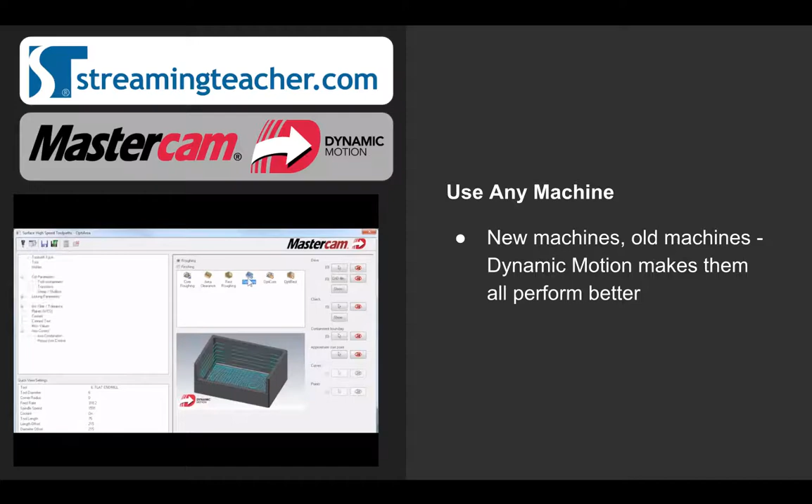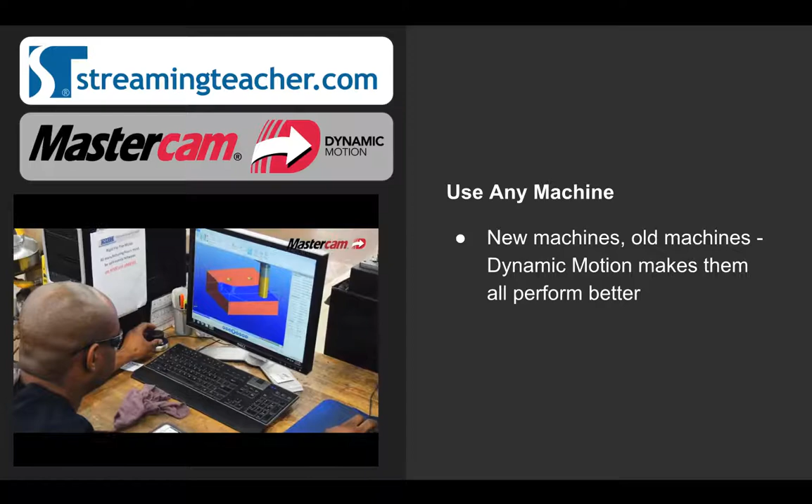I've seen the Mastercam Dynamic Milling Toolpath in the menu a hundred times going through there to get to what I needed. Never really wanted to use it, never understood what it was or how it worked. Then one day I saw a gentleman I work with using it, really liked the idea, got involved in how it works and how it applies to what I was doing, and honestly I would never want to be without it again. My name is Robert Fagelman, I'm a CNC programmer, and I work at Exceed Molding Tool.

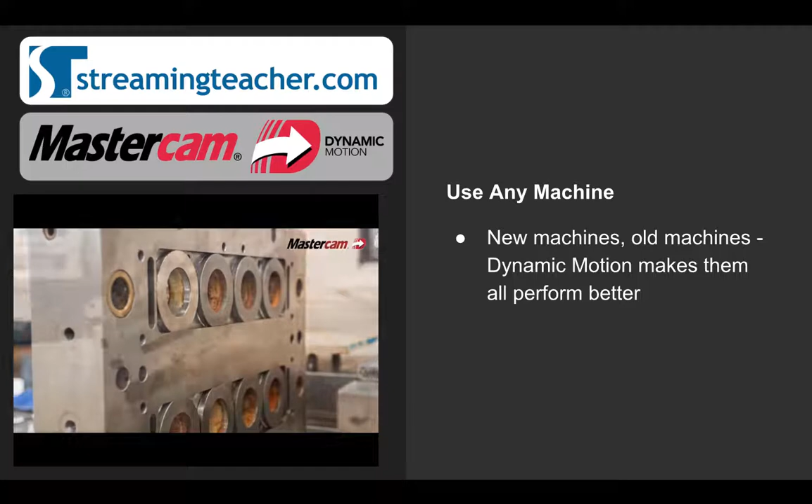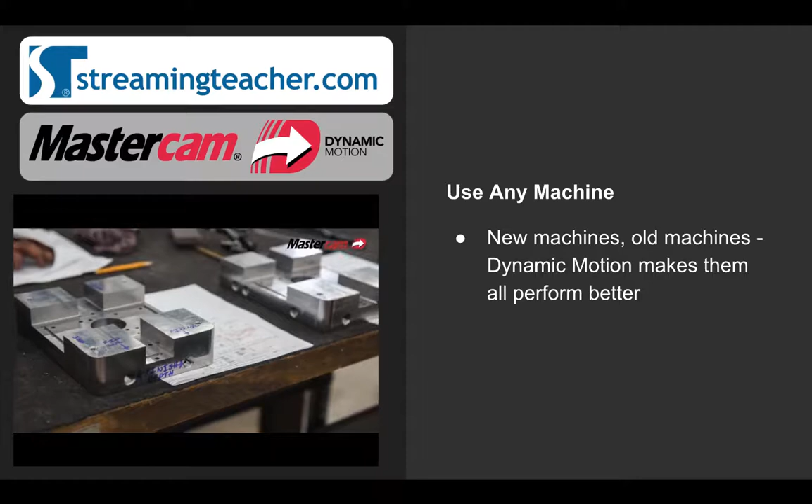When we first started using the Dynamic Milling Toolpath, we tried it on a piece of hardened H13, about 50 to 52 Rockwell. We threw it in one of the keyways we had, and we were kind of laughing because we didn't really think it was going to work. But we gave it a shot because we really needed to get the job done. We put it in there, started milling away, and it just cut right through. Had no problems whatsoever, and it brought the naysayers to their knees, because it was pretty awesome.

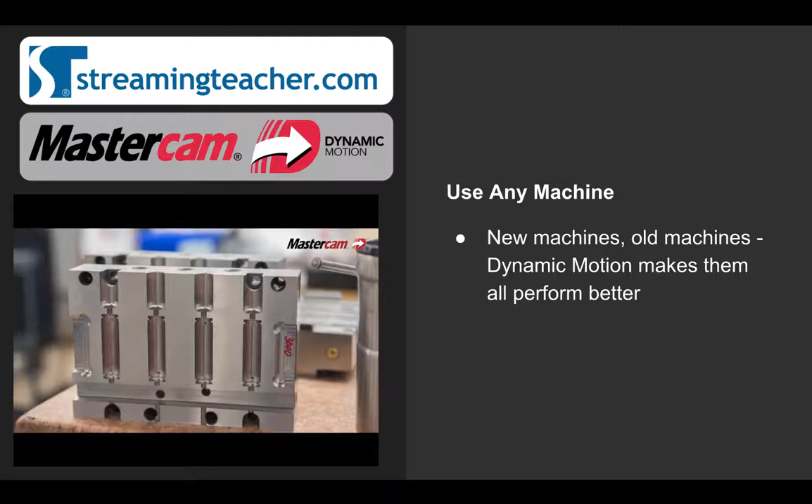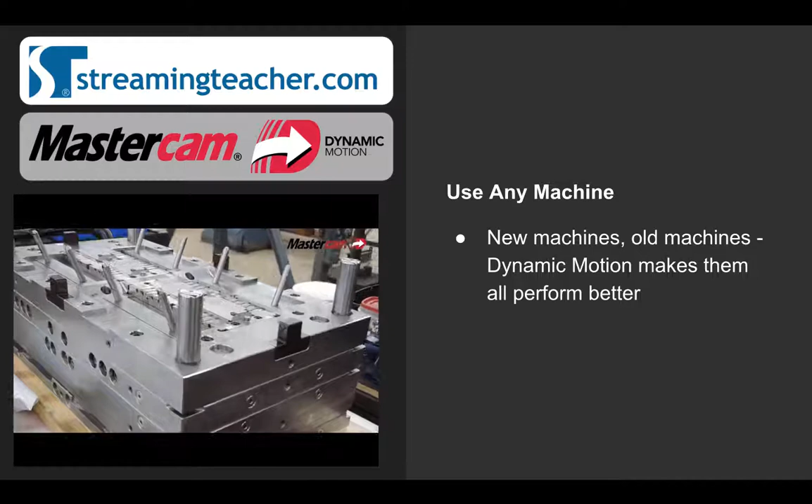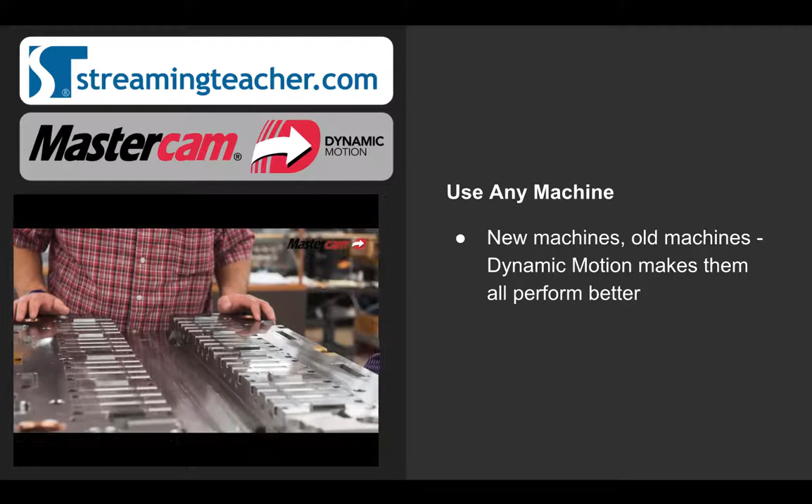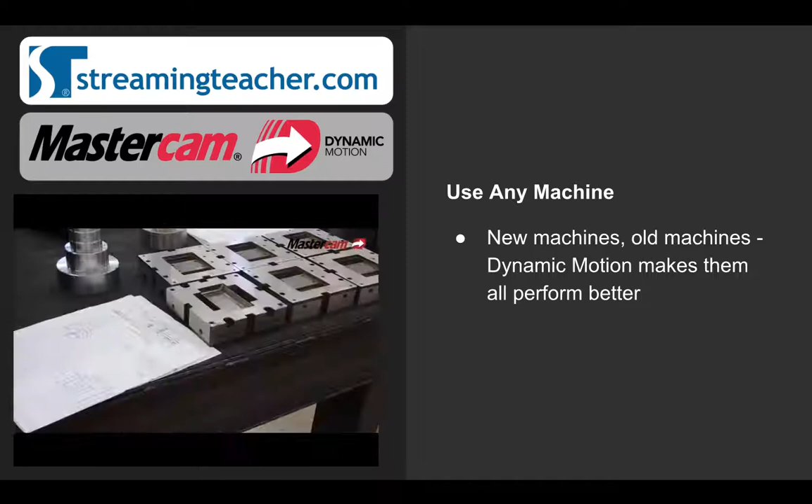The biggest benefit of dynamic motion is tool life, speed of cutting, and the ease it puts on the machine. For example, we had a frame plate with a lot of pocket work in it. Originally I was going to use insert cutters, and I probably had six insert cutters in the program. Then I switched to dynamic milling and got it down to about two cutters, in about half the time it would have taken with insert cutters. I should have been using these from the beginning, and I definitely would not want to be without them. It has changed my world and makes all the difference.

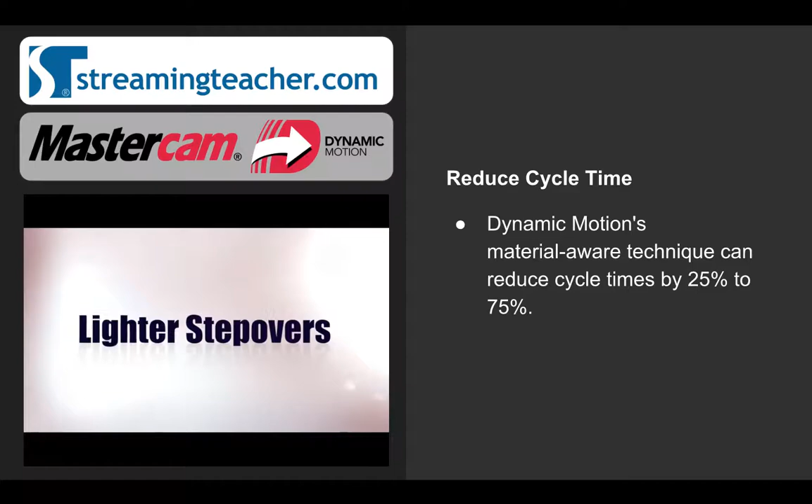Mastercam's dynamic motion allows you to cut more parts in less time. By taking lighter step overs and deeper step downs, it removes the most amount of material possible. It also reduces wasted air cutting, ensuring that your tool spends most of its time removing material.

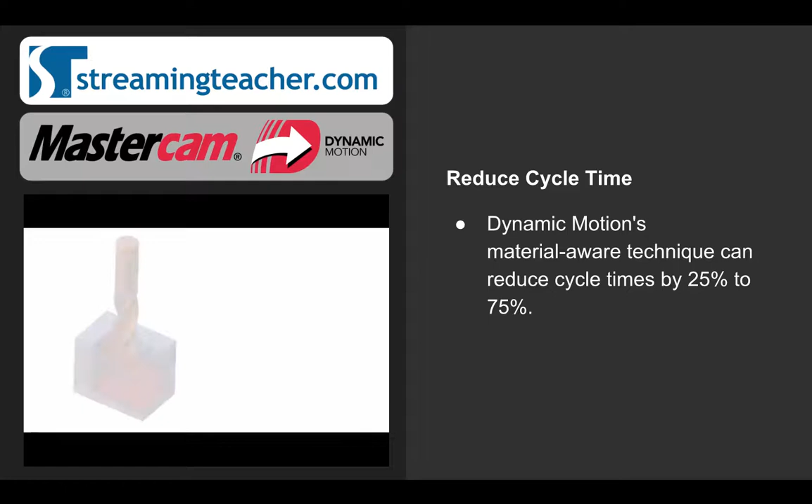Not only does the tool spend more time cutting, but the unique tool motion eliminates repeated step downs and requires fewer tool changes. Less tool changes equals more time savings.

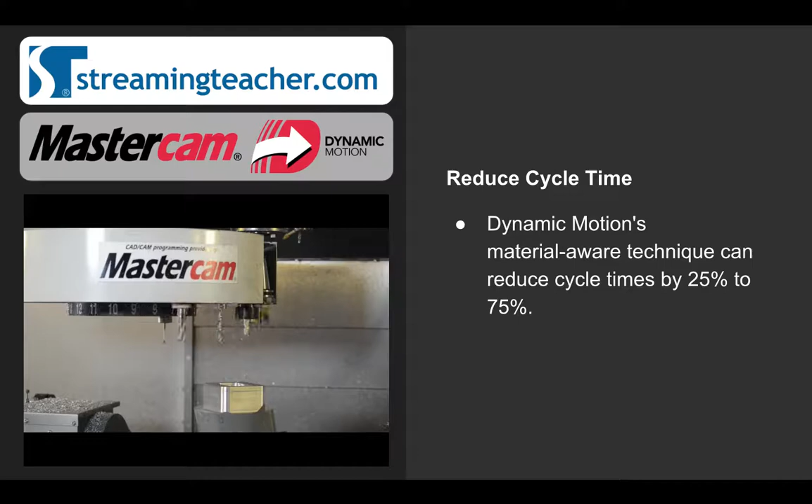Mastercam's dynamic tool motion also produces consistent chip breakage for better chip evacuation. A clean machine is an efficient machine. Cutting more parts in less time means your shop is more efficient.

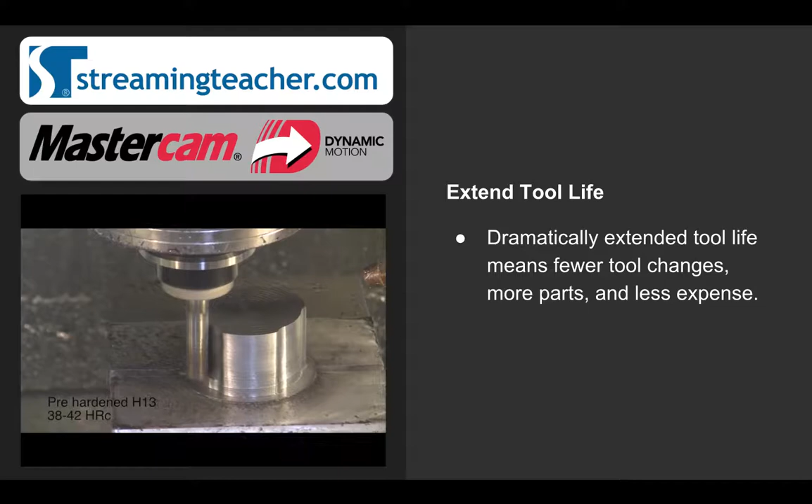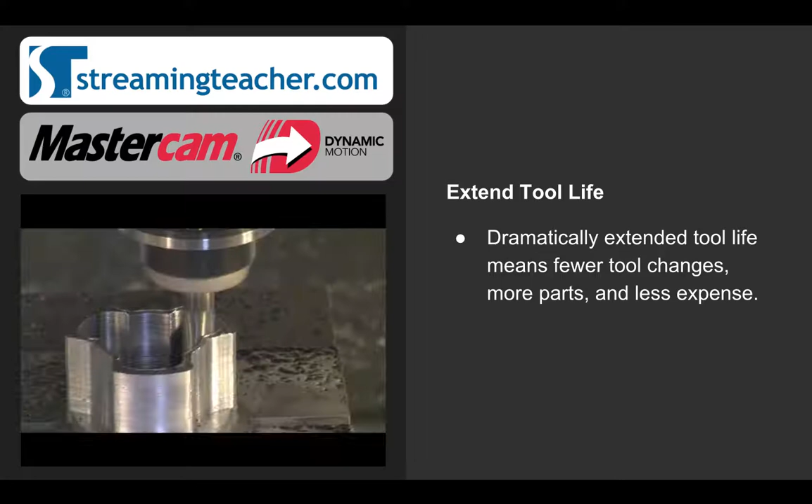Mastercam Dynamic Motion uses a full flute length for more consistent tool wear and extended tool life. By precisely controlling the side cuts, the tool never overloads, even at full depth. Using the full length of the tool ensures even heat distribution and preserves the integrity of your tools. More consistent tool wear and extended tool life lets you cut more parts with one tool. That means your shop is more efficient.

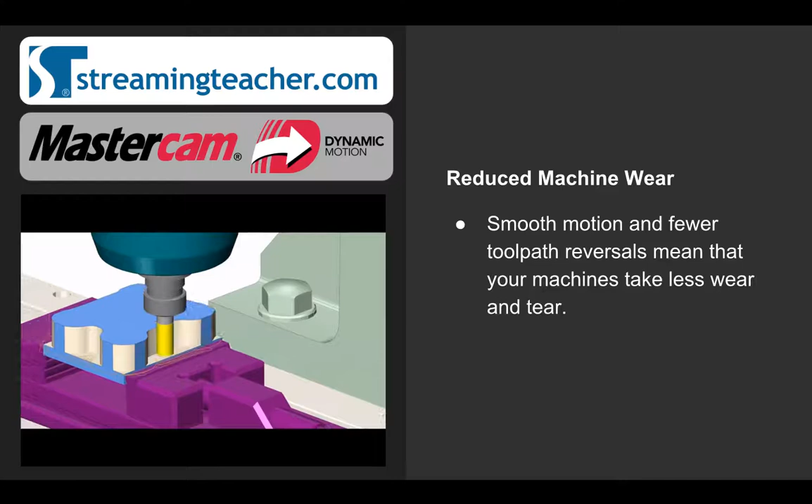The dynamic looping motion ensures that your servos are never suddenly reversed, so your machine avoids harsh directional changes. Not having these abrupt directional changes keeps your machines more accurate with less maintenance. Cutting with Mastercam's dynamic tool motion is smooth and effortless, like highway driving.

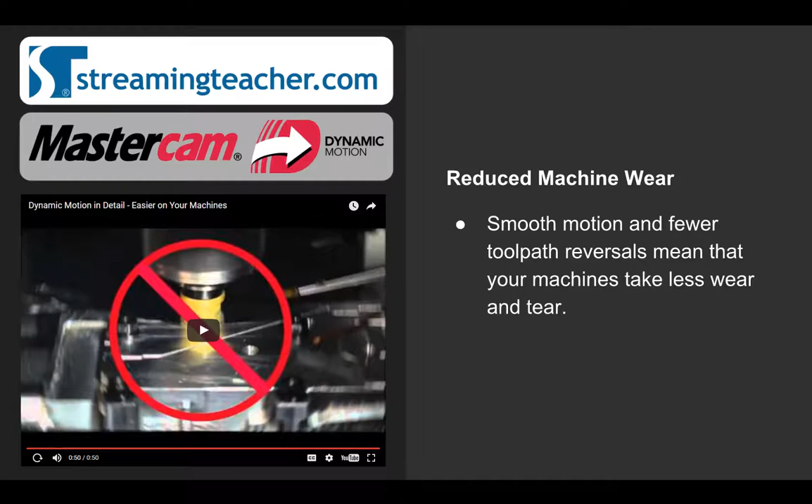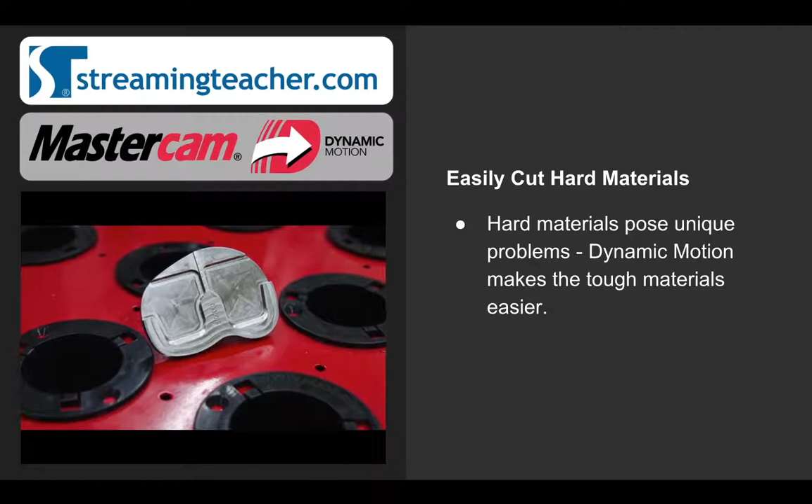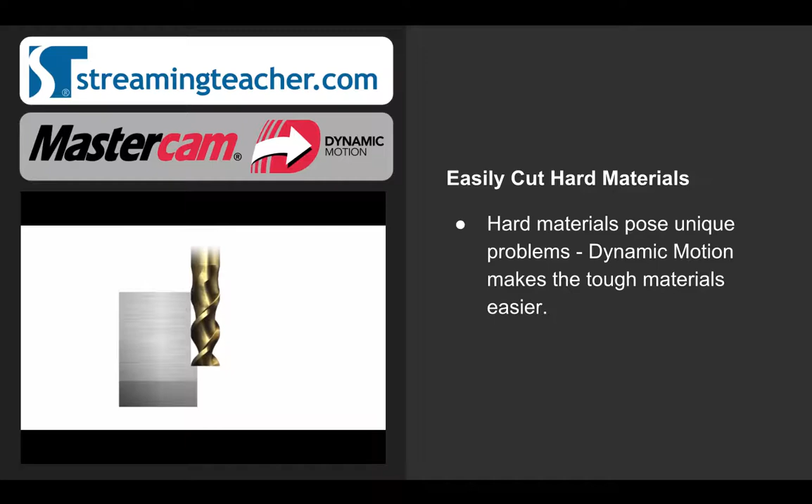Roughing materials like cobalt and titanium have always posed a challenge to shops. Mastercam's dynamic motion technology makes this task significantly easier. The dynamic toolpath motion produces a consistent chip thickness, which ensures even heat distribution and load throughout the cut.

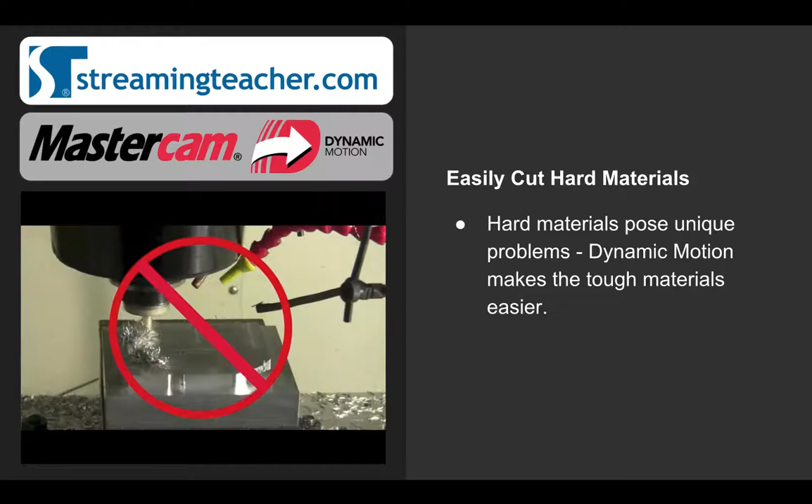By distributing the heat and load, material surface hardening is eliminated, and so are the risks of tool breakage. No matter what material you are cutting, you will never overload the tool, and this gives you consistent, predictable results every time.